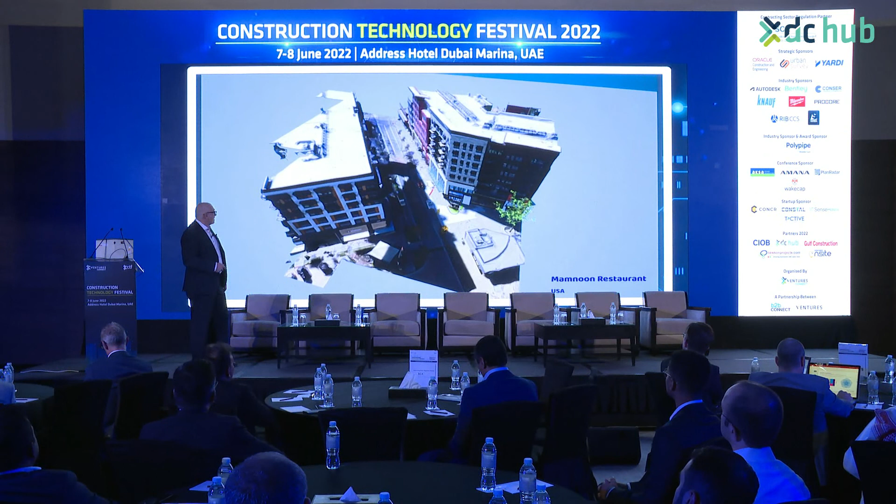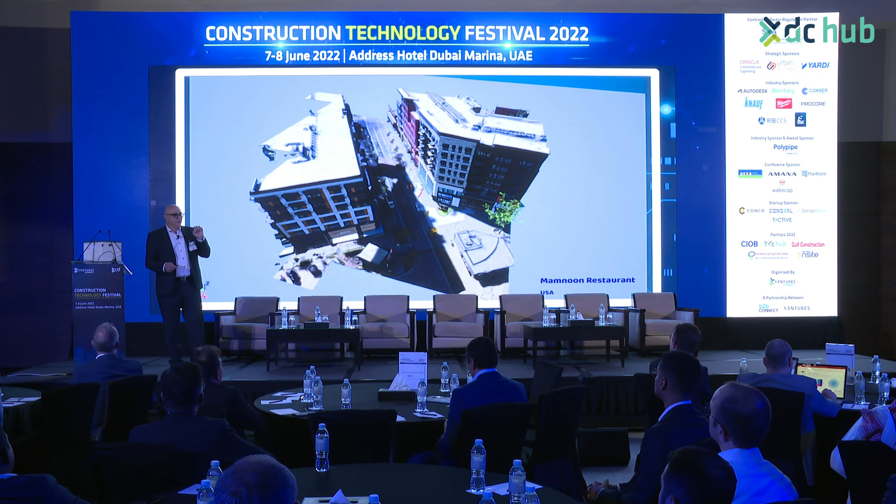This is a real-life project that we did for my older brother in Seattle. He has a restaurant. At the beginning of Corona, he wanted to get a simple thing, his signage, approved by the city ordinance, and they could not get a date for another 4 months. So he called me up, we uploaded the design, captured a little bit from Google Earth, turned it into 3D.

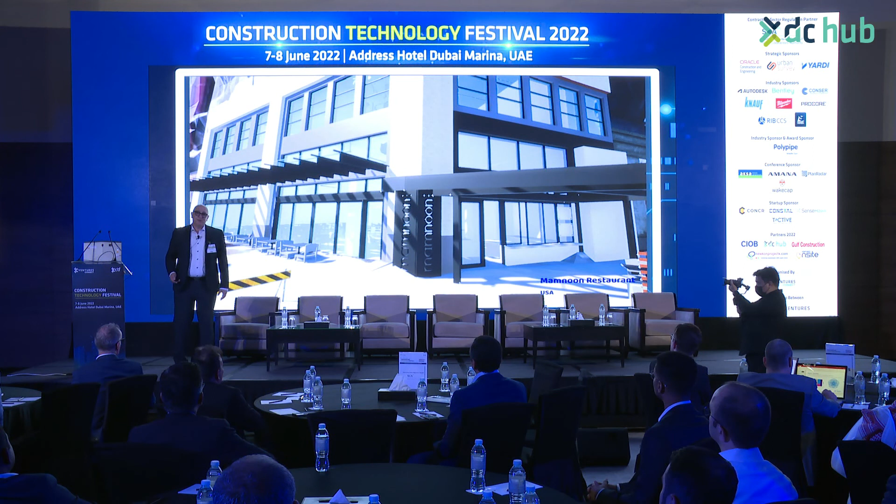We invited them all into a meeting, streamed into whichever device they wanted. They went and visited the signage, looked around inside the restaurant to see what it looks like. Again, nothing amazing in terms of 3D, but remember, it's being streamed to all these people who are in different offices. At the end of the meeting, 7.5 minutes exactly, the city ordinance person said, yes, I'll send you tomorrow the approval. Boom, business.

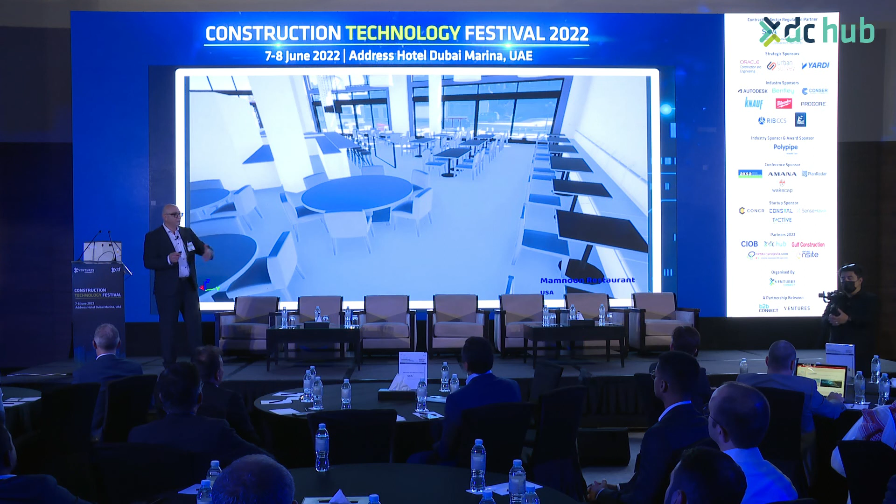I just saved someone $8,500. Simple. And God knows how much it would have been a wait. So we started really thinking about it: how can I take not just the design phase, but take the reality capture phase and move that into it?

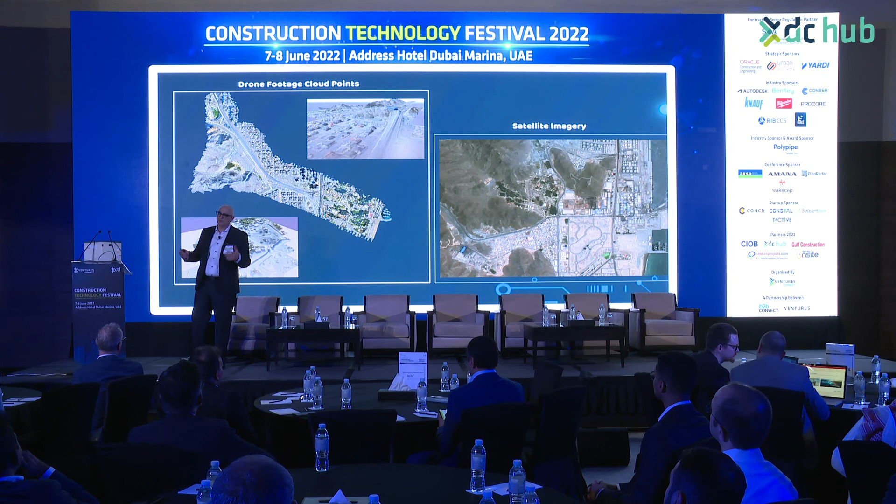And even from satellite imagery, we're working also with some brilliant new companies called Satellogic, 1 meter per pixel resolution from satellite, 24 hours a day from anywhere in the world. Oh my God, yeah.

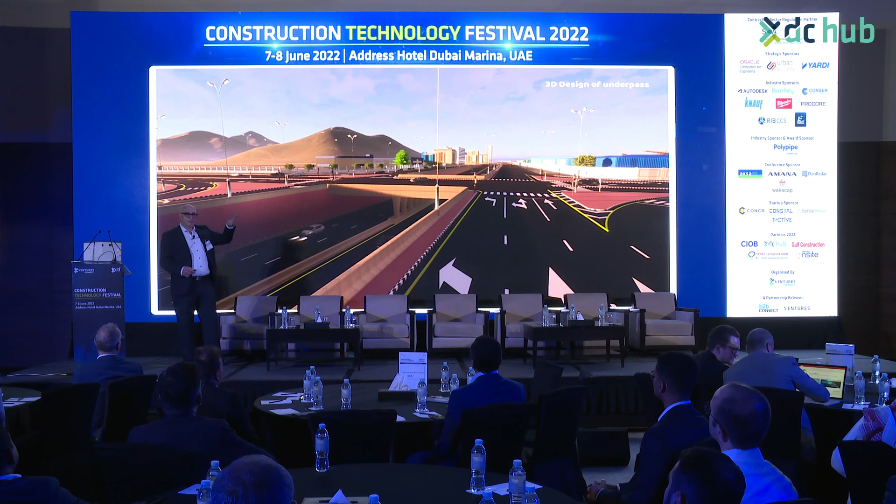Again, simple renders like that could become something you could immediately virtualize in real time with your clients.

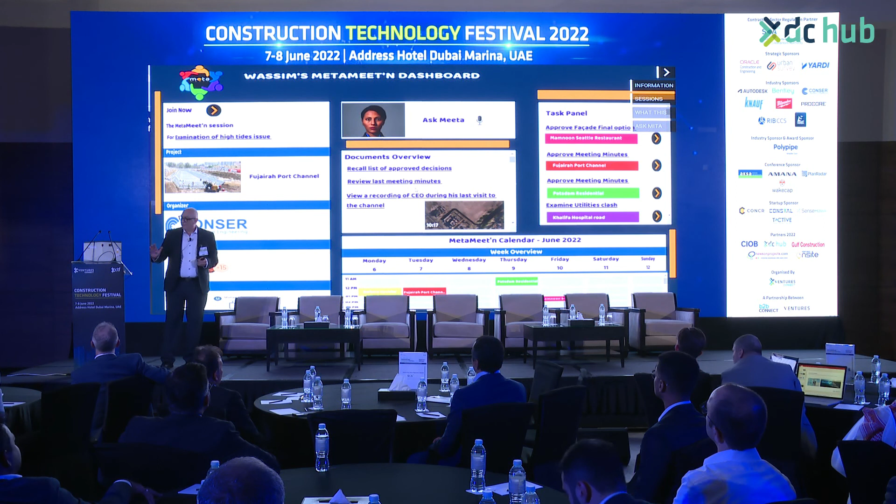MetaMeet'n actually records your whole session and plays it back for you. We also have voice to text, so everyone's stream of voice in the meeting is actually being transcribed and set as the minutes of the meeting. So it's all about the meeting. I'm running this off my 5G phone right now, so excuse it if it lags.

We have our own splash page, which any company can have their own version of. So what's happening right now is my session on the cloud is starting, and this is being streamed right now to my computer, okay?

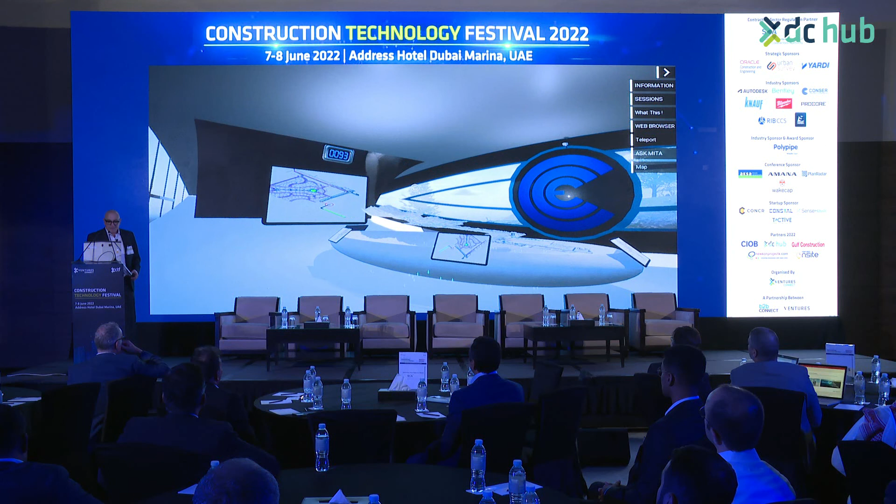So in the process, what I can ask very simply is if Mohammed right now can, okay, we have our own little tablets that everybody gets in the meeting. So anything I want to show you on your tablet, so design drawings are uploaded. We have a model that's also been uploaded over there, so we can actually discuss things on the model before we go on a real site.

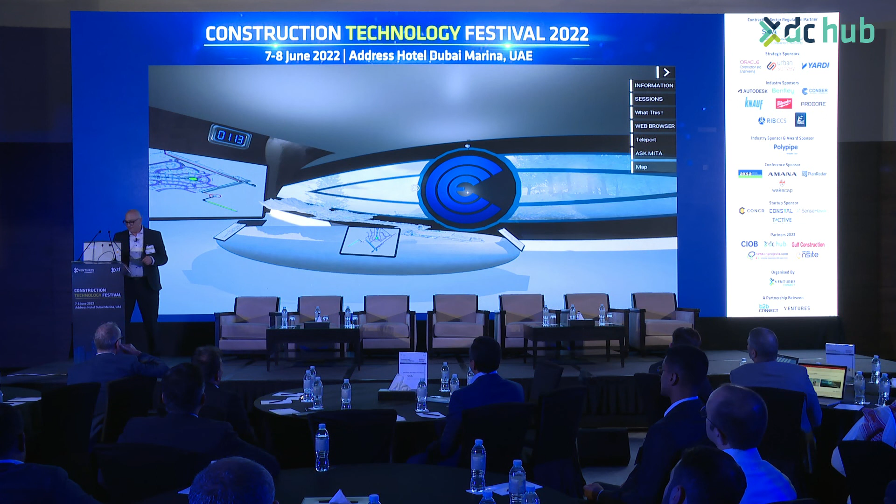We can then go to the real site by clicking a button, and I will use the benefits of the amazing things in VR. I will fly up a bit so I can look down at the whole thing. So what we're looking at right now is a culvert that we're in the process of constructing.

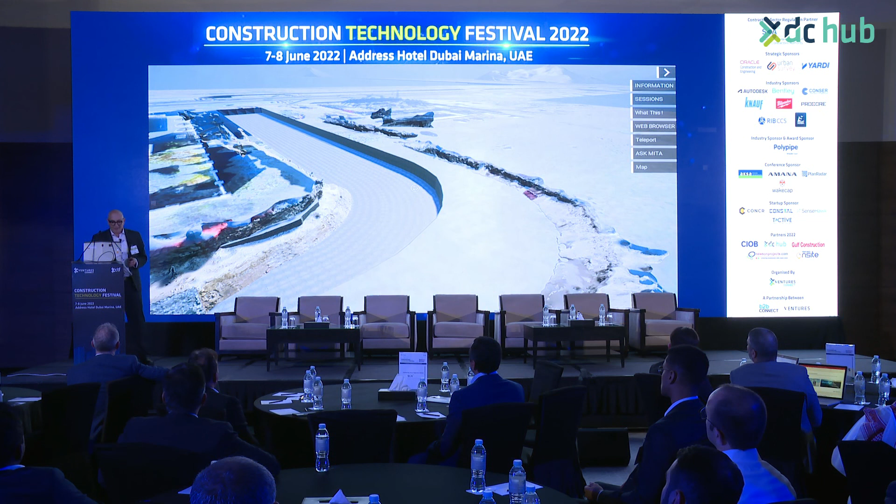We've finished the design, and this is actually happening 2 days ago. So yesterday I asked my people to actually capture the reality of the project. So Mohammed, can you please show me how the contractor has actually executed the final? So this is the design. And show me the final, please, that you captured yesterday. And that's what they asked.

Simply speaking, we actually asked that during the curve of the water, we looked at the flow metrics again, and we found that we actually need to enlarge the curve. So that was changed on site 2 days ago. We gave the instructions, and yesterday it was captured. So I'm a very happy consultant. Somebody listened to me without much affecting claims. So we're done over here.

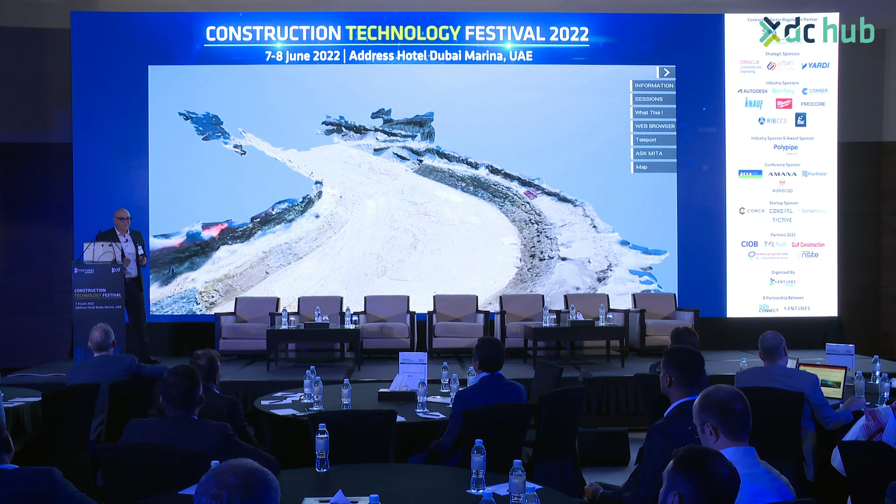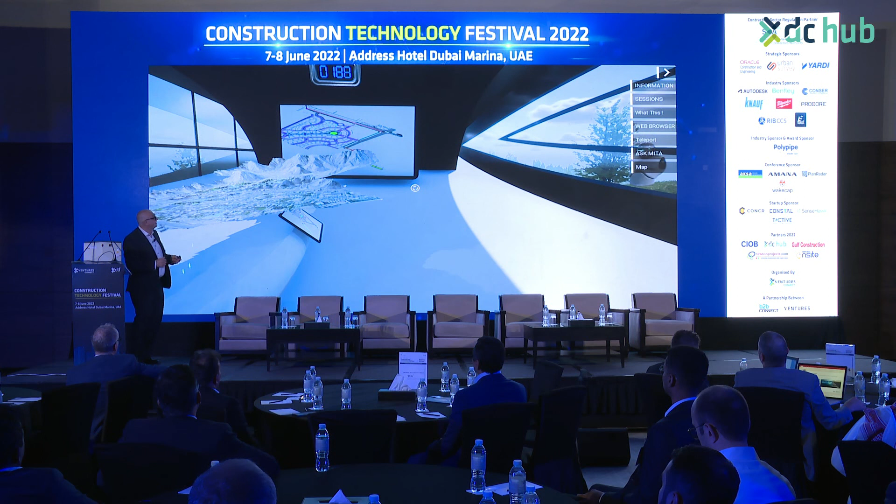Again, I can go back to my office, review with my team any last-minute things that I need to do, which he just bumped into my face, and then we can set the minutes of meeting and leave. So that's our version of the metaverse in construction.

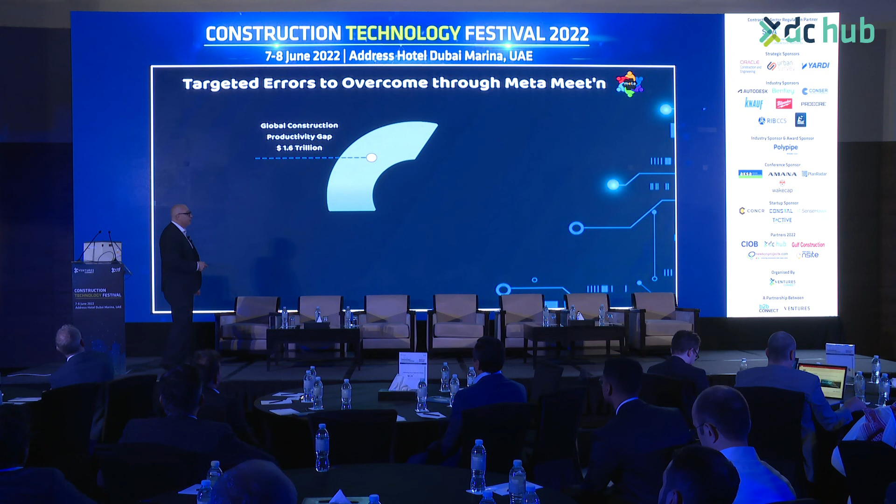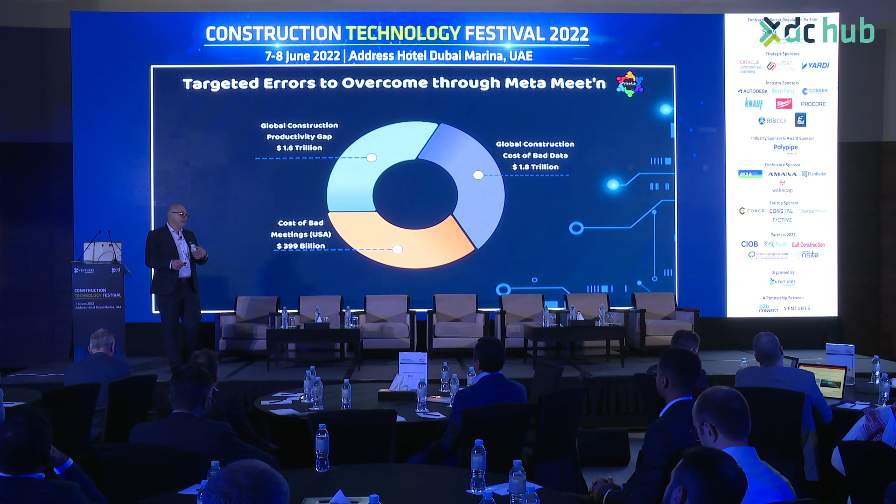And what we want to do is focus on one main thing. We all know this data that's coming out: production gap in construction, $1.6 trillion annual. Construction cost of bad data, $1.8 trillion. We also started looking at it from another way: what is the cost of bad meetings? Bad meetings resulting in miscommunications, which result in what we call rework. And that's a very big thing that we're talking about.

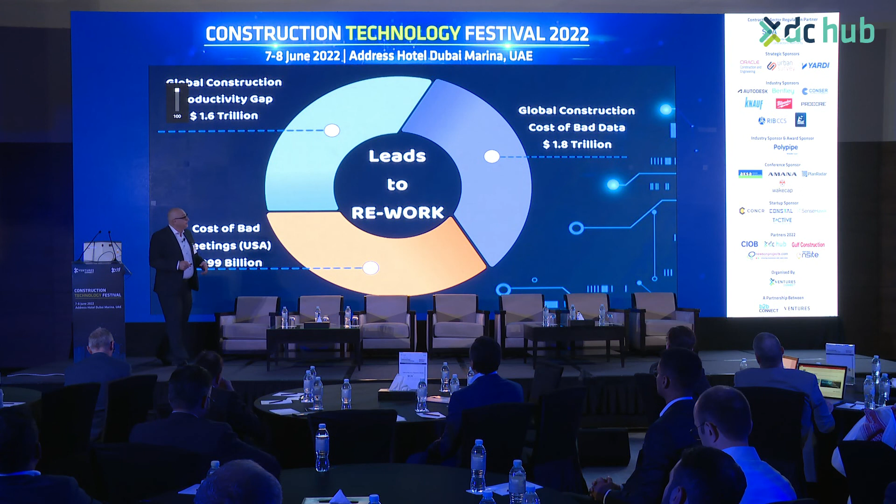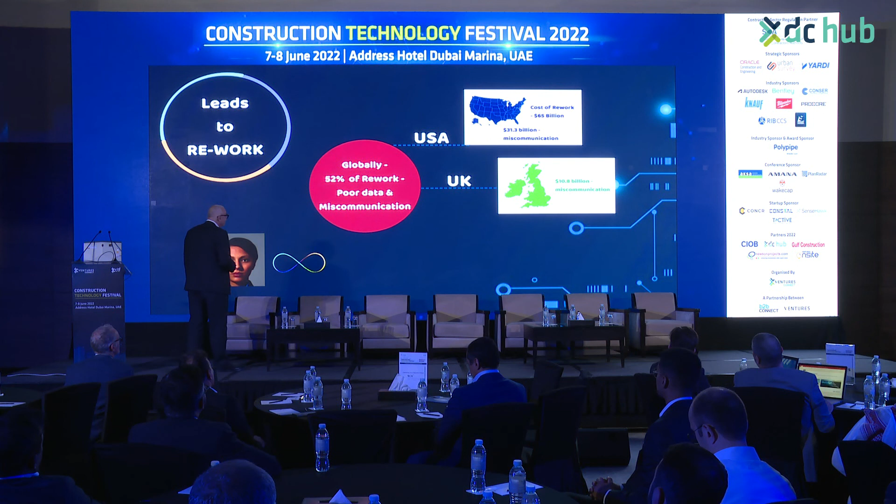What we did is, once you upload all the design files: on average, 52% of all rework globally is caused by poor data and miscommunication. By the end of 2018, the cost of rework in the USA construction sector totaled $65 billion, of which $31.3 billion are attributable to poor data and miscommunication. Similarly, the costs in the United Kingdom total $10.8 billion and in Australia $8.4 billion.

Again, annually. This is Meta. Meeta is our AI-enabled meeting assistant. She will be making an appearance in MetaMeeting as well. Meta is capable of looking not only at your design drawings, your 3D drawings, but Meta will look at any other drawings or files that you decide to pull up.

Using natural language processing, if you ask Meta a question that whoever you're meeting with doesn't know because it's a complex project, she'll dig into it and she'll find it for you. We're testing Meta right now, and Meta is doing quite a good job.

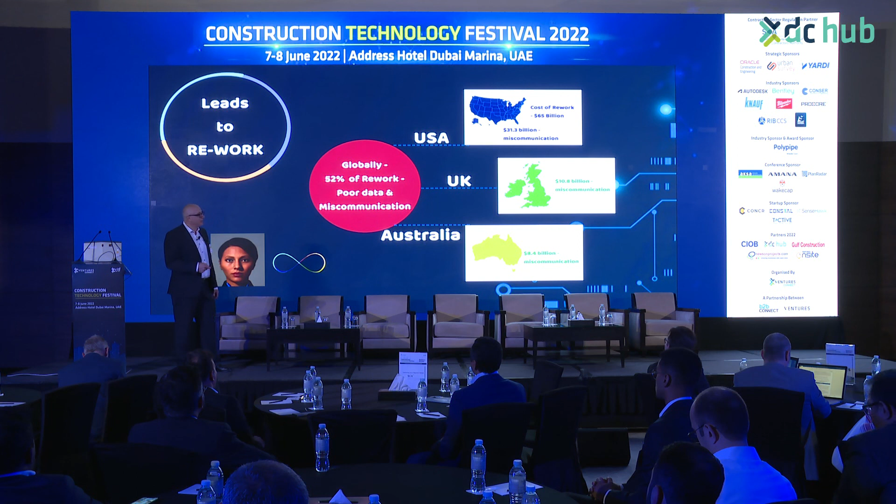So, simply speaking, Meta Meeting, we want to minimize open-ended discussions in construction meetings. We want it to be focused to the point. We want to minimize deviation from the core intent. So you go in, you describe. No longer does somebody need to go and say 2D in the drawing to 3D in my head, to maybe the wrong color or the wrong schedule. We want to minimize the visualization gap. We want to minimize the repetitive changes, all of these other things.

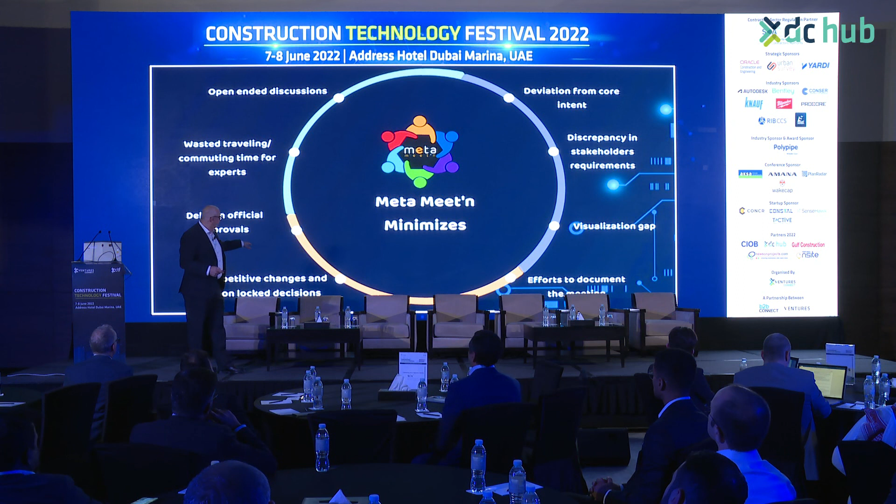What we want to give you is all these tools. So again, pre-conducted meetings, you can go on your own. We have many amazing case studies right now. We're working with a developer in actually having the meeting start from the concept design stage, from the tender of the concept design, so architects will just upload any file they want.

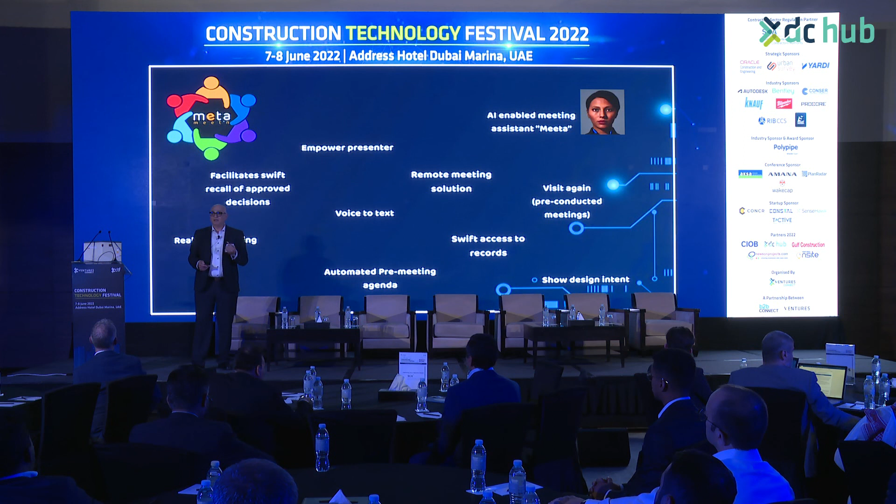So again, please, not just show me your design, walk me through your design. If you take that process to the chosen concept and move it to that concept I've chosen, I want you to give me the new milestones of design so I can see them all the time. We're not talking about BIM coordination, but we'll take the BIM file, we'll upload it. We're talking about a meeting tool that would reduce the errors in your communication. And that's what Meta Meeting is about.

Any questions, please? Have you done a deep dive analysis to really identify the contributors to those root causes?

We've been working with, right now, deciphering a lot of the analysis that's been made. And this is one of the reasons why we combined in our analysis of the business model, let's put it this way, we started looking at the combination of the data from bad meetings and what makes a bad meeting. We also know from our 50-plus year history as a consultant what the resultant costs of bad miscommunication through meetings are. So we really didn't reinvent anything, we just basically gave ourselves a better tool to deal with our own clients. And of course, loving startups, we basically said, this is a startup, off on your own. So yes, we have done a very deep dive into why meetings are the essential place.

Okay. AI analysis, or analysis based on AI and modeling, artificial intelligence, it all depends on the quality of data and the abundance of data. So, based on the analysis that you've done, can you quantify, high level, the quantum of the data that you've used to develop the models and the quality of the data? How did you ascertain that the data is quality data? That's honestly a very loaded question, let me answer it in two ways.